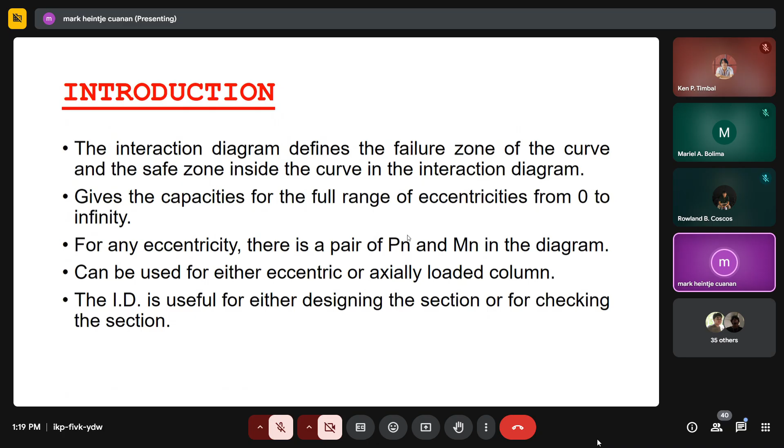So you may have a column subjected to a very small moment, but it carries a large amount of axial loading, wherein the intersection point goes beyond the boundary of our curve. Or it could be that the moment is very large while the compression load is small, but still, the same thing happens—it is beyond or outside our curve. So in that case, it is also an unsafe column.

So in the interaction diagram, we have actually 7 major points. Later on in our example, we are going to focus on these points, but actually in actual design you can iterate to make your curve smoother, since if you focus only on these major points, the tendency is that the curve will not be smooth, unlike the results from software and so on, wherein the curve produced is very smooth.

And so we have here 7 points, and our calculation later on will also be basing on these particular points.

So the first point is point 1, wherein we will have axial compression with zero moment. This is the point wherein the column is subjected to pure compression without any moment at all. In this case, the formula that governs is P sub O, whatever the value of our P sub O, which is dependent on the type of column. It could be a tied column, a spiral column, or a pre-stress column. That is how we determine P sub O, or point 1, wherein point 1 is purely axial compression with zero moment value.

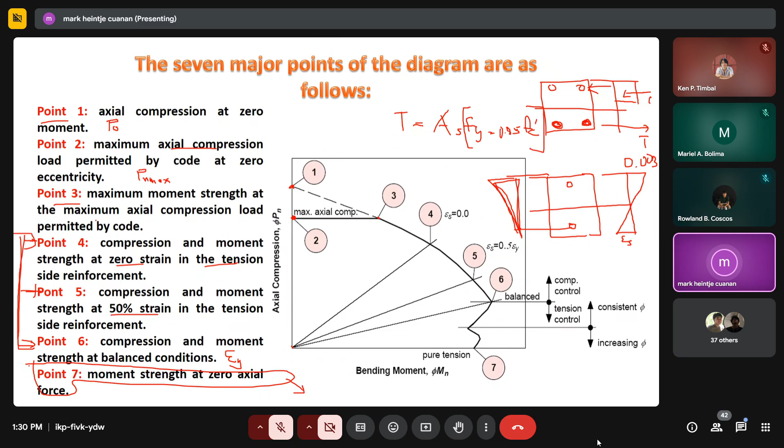So we are going to derive these points and create our own interaction diagram. But take note, this afternoon my focus is only on this simpler case, for simplicity, and so the calculation becomes easier, where reinforcement is only on two sides.

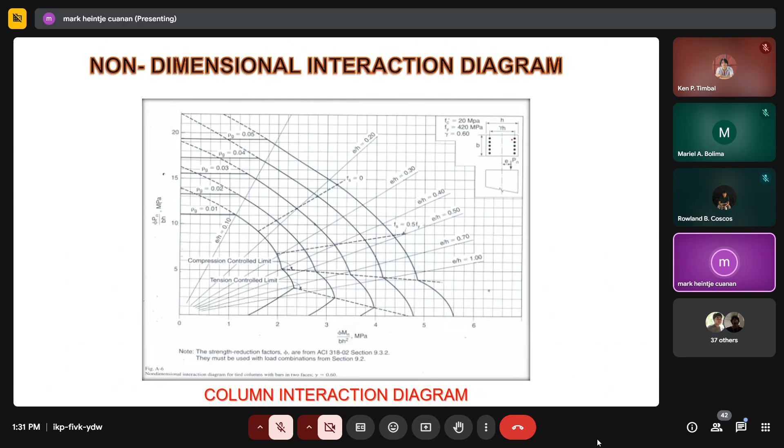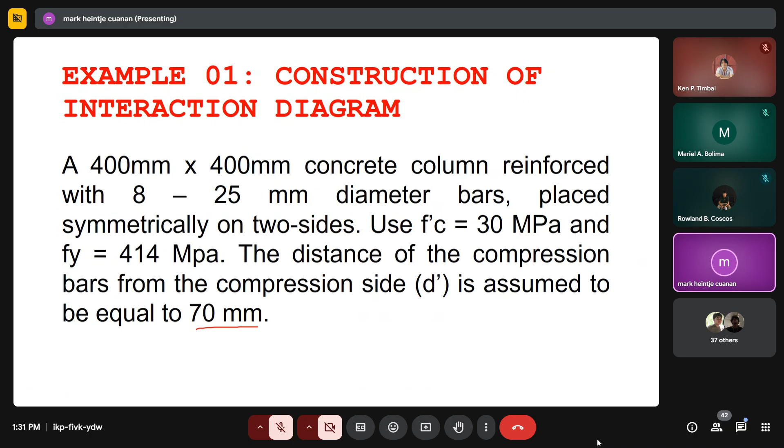Allow me to transfer this into my Excel file, which I have already provided to you for reference, because when you design your column, your plate, we are going to construct your own interaction diagram. So here I am going to write the different given basic parameters.

So here I write 400 mm for the side of our column. Take note, when the column is rectangular, you tend to create two interaction diagrams because it has different capacity on each side. Although in this particular column the sides are the same, it will still produce different capacity.

If we look at this, let me print screen. Okay, so if it's like this, when we design it like this, our consideration for the compressive force will use reinforcement on each side of our column. So this is the compression side, and this is the tension side.

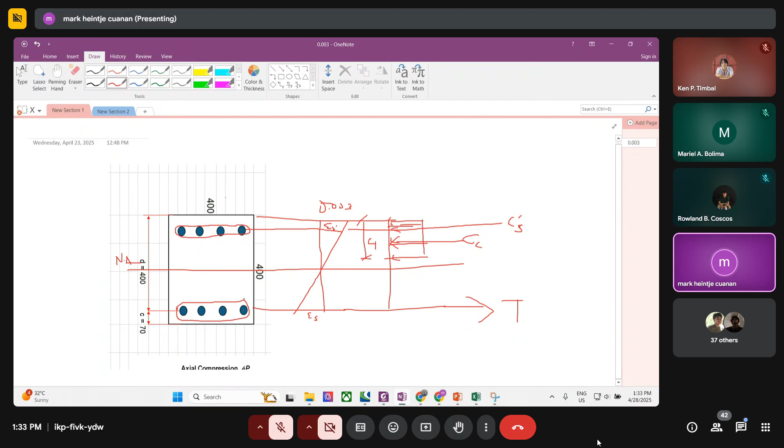But when we rotate it like this, you will have different values, meaning in terms of the compression side, you have compression reinforcement forces here coming from this reinforcement, and you have tension reinforcement, which is also two pieces, coming from this reinforcement.

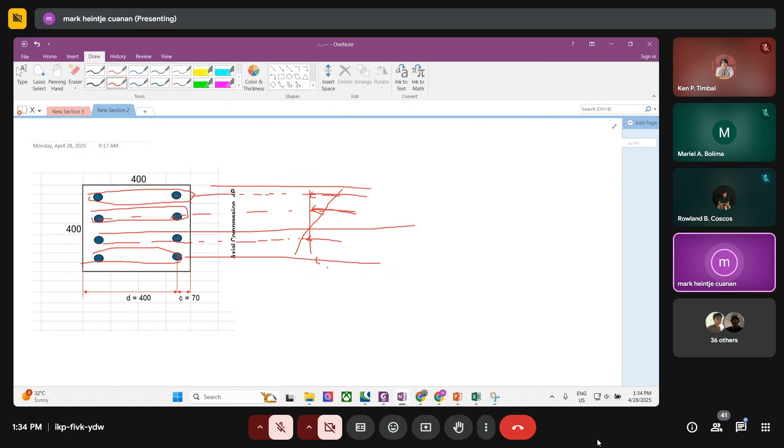But take note, the calculation method we are going to do later will be used in all types of columns or configurations. You just modify it based on the reinforcement configuration. Okay, so let's go back here.

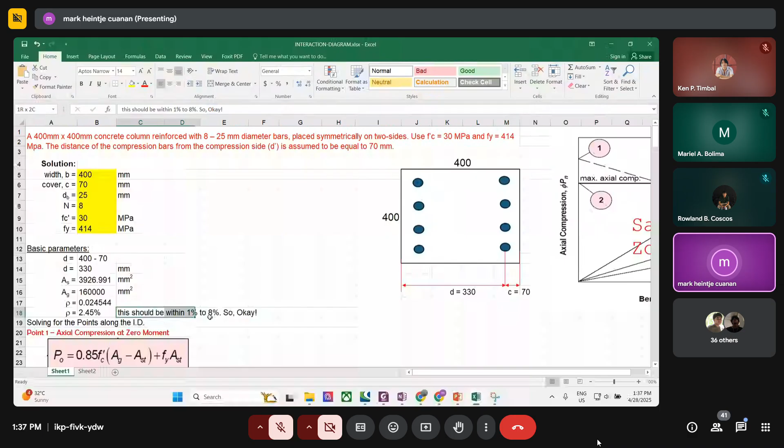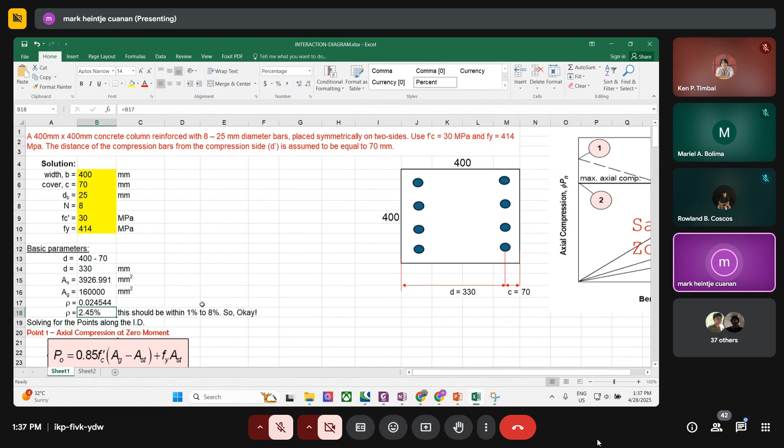So we got 2.45%, and that is within our limit of 1 to 8%.

Okay, so again, at point 1, this point 1 here, this is actually the P sub O, our axial compression at zero moment.

So that is why in this case the P sub O will be 0.85 of FC prime, the gross sectional area of our column minus the steel area, plus Fy times the steel area. So it will give us a value of

5,605.636. So this is the point 1 here. So its coordinate is 0 for our moment, with P sub n or nominal axial capacity equal to P sub O, that is

5,605.636. Then our point 2, this is the maximum permissible compression based from the code, at zero eccentricity. And according to the code, for a tied column, the Pn max is simply 0.8 of P sub O, so that means 0.8 of P sub O gives us

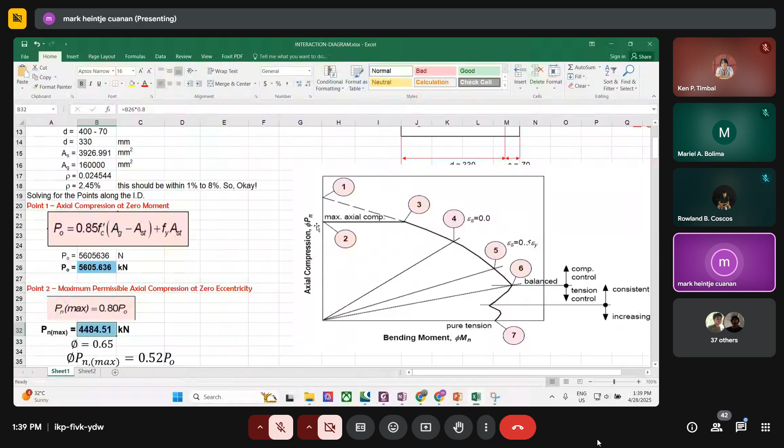4,484.51. So that's the coordinate for this point 2. So point 2 now becomes, its coordinate is 0 for our moment, with y coordinate of

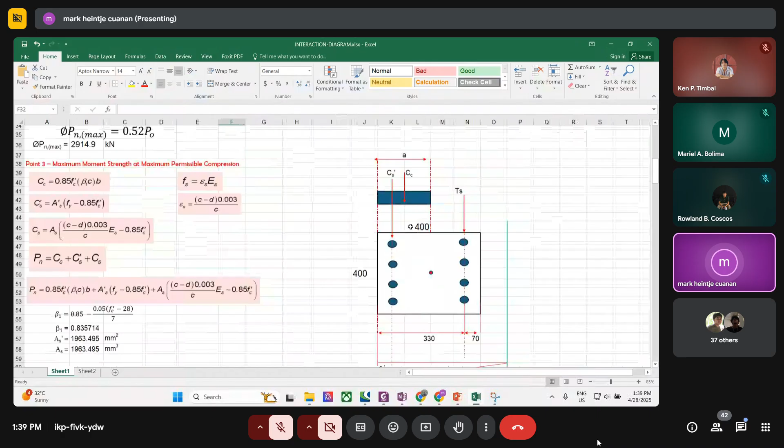That's the calculation. So if you notice here, at point 3, our depth of compression or our neutral axis goes beyond, it actually goes beyond the width of our column. So if you notice, our letter C, or our depth of neutral axis here, exceeds 400.

That is normal for point 3. So take note of that, at point 3 our neutral axis really exceeds, it will go beyond the width of our column.

And then from that alone, this is our C, meaning the area is beta 1 of C. And then from the compression side, this is C sub C, the compression which is produced by our concrete.

This is the compression produced by our concrete. And of course, our C sub S prime, which is the compression force produced by our steel reinforcement at the compression zone.

And this one, you can put it here as C sub S or T sub S for the tensile reinforcement. But in this case, it becomes C sub S. Allow me to change this one to C sub S, because it is within the compression zone. It's still compression, right?

Okay, diba ang atong tensile zone is where our neutral axis or our strain transmits from compression to tensile. But if you notice, the compression reinforcement, supposedly the tensile reinforcement, at the right side here is within the compression zone, so that means it is still a compression force. That is why instead of the arrow going up, opposite to our compression forces, its direction is the same with regards to our compression forces.

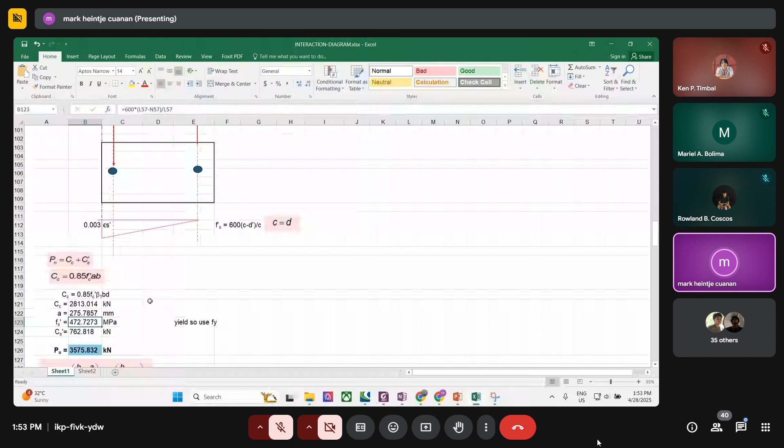Okay, so the resulting C sub C now is 2,813.014. Before we use our F sub S, we check if it yields or not. We solve for F sub S prime first. Going back to our beam, we use ratio and proportion to get the strain, and from that strain we multiply it with our E sub S to get our F sub S. In this case, the resulting value is 472, more than the 414 yield strength, so that means this yields. So instead of using F sub S, we are going to use Fy.

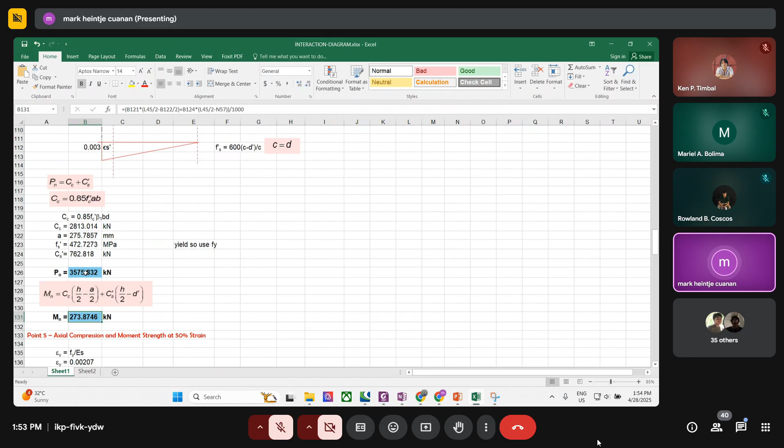So if Fy yields, this means C sub S prime is the same value. Fy applies here, so we just equate it. They are the same, meaning P sub N is simply the sum of C sub C and C sub S prime. And of course the moment from our tensile reinforcement is 0, so we only have C sub C with its moment arm and C sub S with its moment arm. So the coordinate now of P sub N and M sub N becomes the coordinate for point 4.

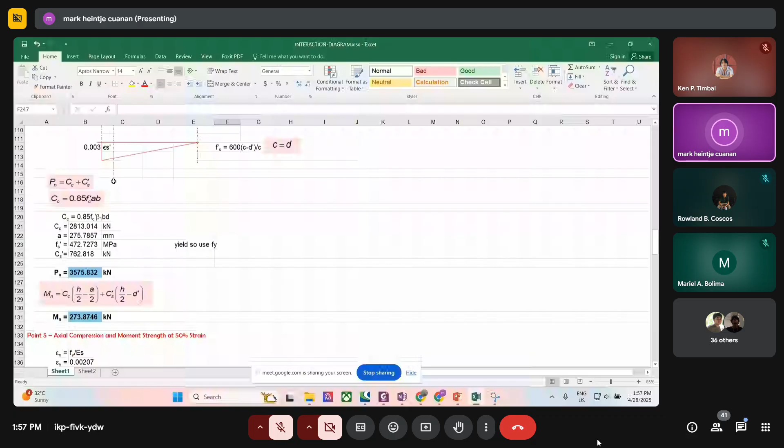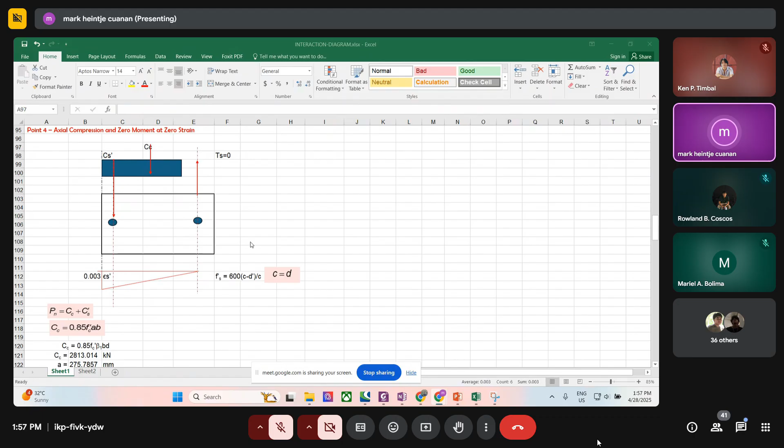We assume that the strain at the tensile reinforcement is equal to 0 for point 4. Now for point 5, the process is the same, but this time the strain at the tensile reinforcement is simply equal to 50% of our yield strain. So we get the yield strain, that is Fy over Es, take 50% of it, and that gives us the value of the strain here. That's the target strain. And then we use the same process just like what we did earlier.

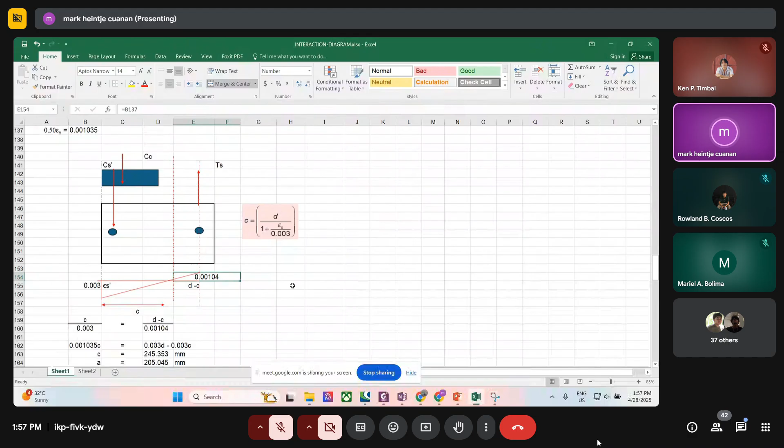So we solve first the value of C since these are already given, by ratio and proportion, and we already have the value of our D. So we get C equal to 245.353, and that also gives us a value of the depth of the compression block, 205.045. So from these values we get the value of our C sub C, and then we check the value of our Fs prime to see if it is yielding, to get the value of our C sub S prime.

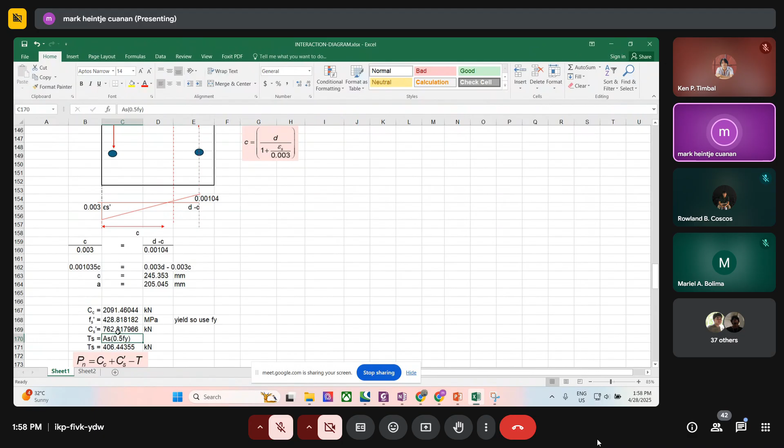If you notice, this is also yielding, so that means the C sub S prime we use is the same, since the steel still yields, so the resulting force is also the same. For our T sub S, the tensile force, you will notice we only use 0.5 of Fy, since our assumption here is that only half of the strain is being utilized, so our tensile force is also half of our yield strength. Then we get the moment, the capacity moment.

But if you notice here, in the nominal moment, all the moments produce positive values, because the directions are opposite. When we take moment at the center, this is counterclockwise, and this other one is also counterclockwise, so that's why they are all positive there. It will give a value of 355.874, that would be the nominal moment capacity.

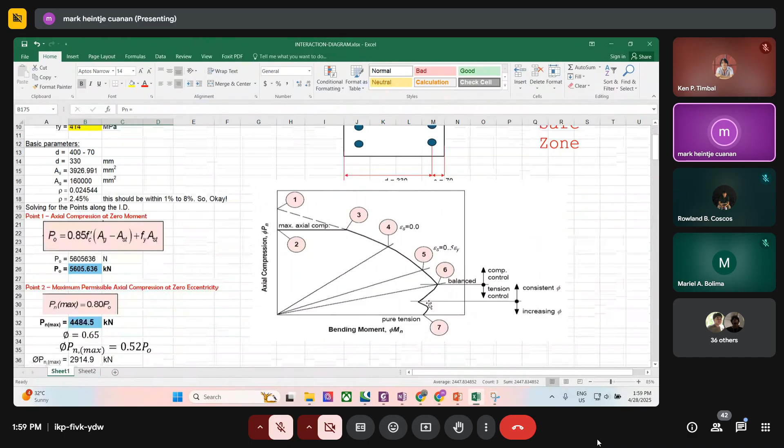Considering 0.5 of the strain, so these coordinates now, take note, this is the coordinate at point 5 on our diagram. And then point 6, that is the balance condition.

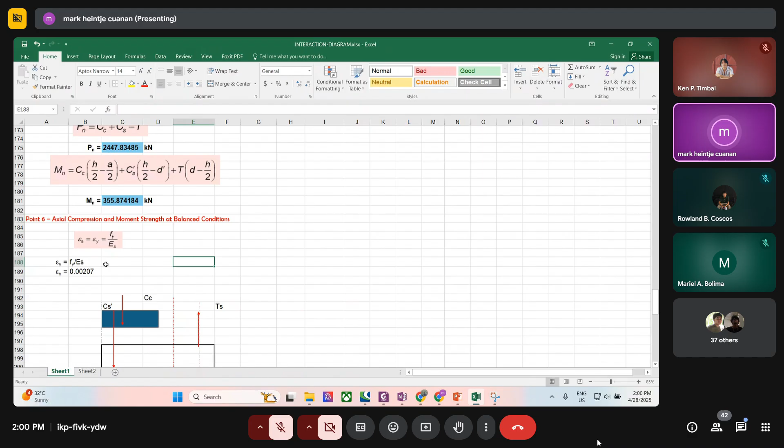So in the balance condition, we just assume that the strain at our tensile reinforcement is yielding, so that means E sub S is simply equal to E sub Y. In this case, the yield strength at our tensile reinforcement is also yielding, so that means it is equal to F sub Y. Okay, so we use ratio and proportion again.

But in this case, we don't actually know if our compression reinforcement yields or not, so that is why later on we will check if our compression reinforcement yields or not. So if you still remember this formula for balance condition, our depth of neutral axis is 600D over the quantity Fy plus 600. So we get C sub B equal to 195.266.

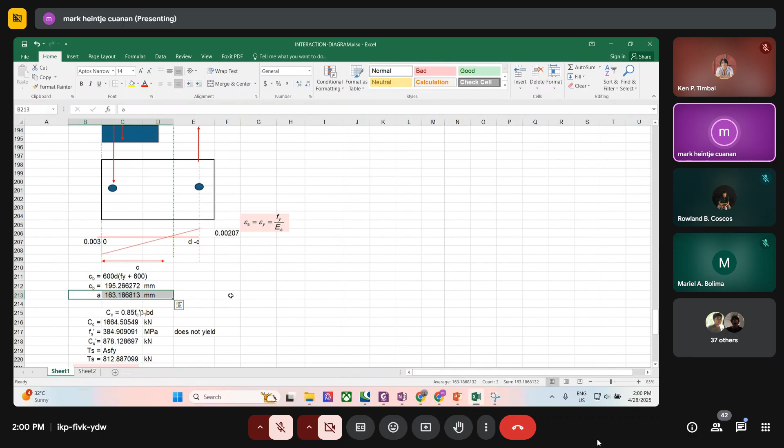A is 163.1868, wherein we can use that for our formula here - this one doesn't apply actually. So we get C sub C, that is 0.85 Fc prime times A times B, so we get 1,664.505. When we check the Fs prime here, same thing, we use ratio and proportion again.

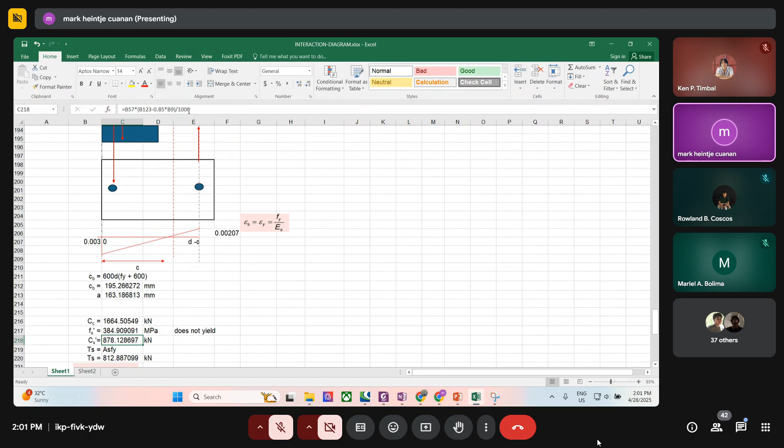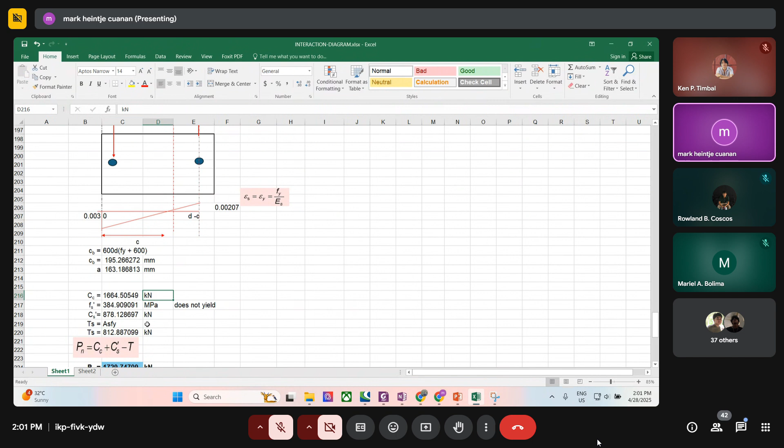So it is less than our 414 yield strength, so wala siya nag-yield. So unang nag-solve kag bag-o, kumbaga, nga compression force based on our compression reinforcement. Si T sub S, ato lang i-multiply, no? Ang ato ang AS, i-multiply lang na to actually. ASFY lang siya largo, ASFY.

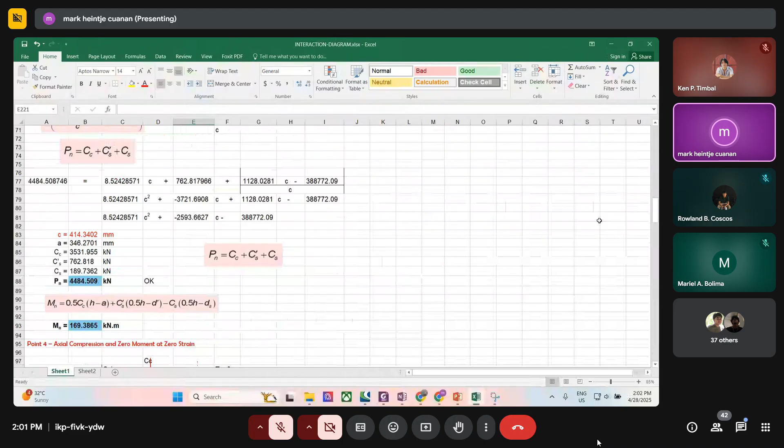So ano yung atong P sub N? I-add lang nato ang duha ka compression minus the tension, and then you get the moment capacity. So ganina, same ra nag-process kung ganyan siya ito nato pagbuhat ganina. Same ra itong process nga gamiton nato to get this particular value. So same pa rin, you extract the values of your nominal axial compression and nominal moment capacity, because this will give us the coordinate of our point 6, itong point na to.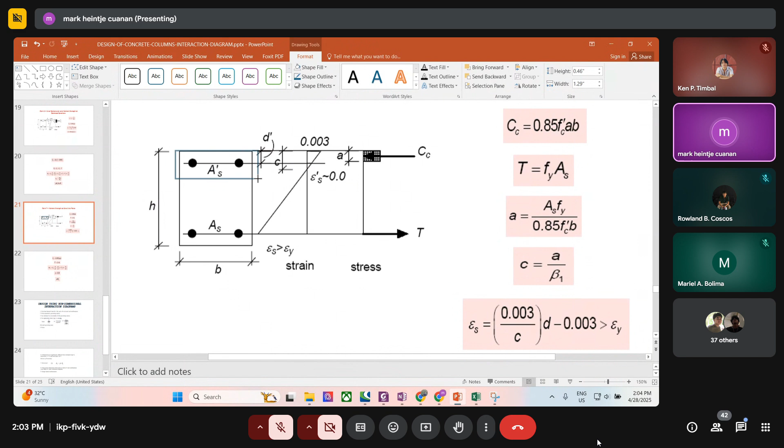So wag kay mabuhat ana, i-appeal gyud nimo ang compression reinforcement. So for example, A nimo nga ko is ingon ani, so i-appeal gyud nimo ni, kay ano man siya, included man siya sa compression force. But in this case, since almost 70 man siya, wala siya appeal, so please allow me to disregard the effect of my compression reinforcement.

So naa tay moment value nga 235.861. So kana dayon nga mga moment and actual capacities from point 1 to point 7, ato din ang i-tabulate. Mao ni siya. This is the first, or these are the values coming from the calculation ganina.

Pero dapat kani wala pa ni siya'y reduction factor. Okay, wala na siya reduction factor. Right? So and then i-plot dayon nato na, mo ni nga plot. Now this is now your interaction diagram, wherein kung given ang ato ang mga forces sa ato ang column, for example, ang

Actual compression nga gi-carry is 3.5, so na diri, yan, nag-carry dayon siya og moment nga 170, di ba? For example lang 170 ang iyang moment nga gi-carry, so naa siya diya. So that means below siya sa tuang curve. In terms of nominal capacity, safe siya, kay within man siya sa safe zone. Pero kung ang intersection ganit niya mula pas palong didto ana lugar, unsafe na din siya.

But take note, dili kani ang atong gamiton to investigate the column, kay dapat ang atong gamiton is katumang na anay reduction factor. So mao din ang reduction factor na to kung pag compression control ang akong gibuhat, lang ani gi-multiply lang nako kanitanan nga value dire, gi-multiply lang nako by 0.65. Mao ni sila, kay compression control man. So 0.65 akong gi-multiply mo ni ang value, then ako dayon siyang gi-plot.

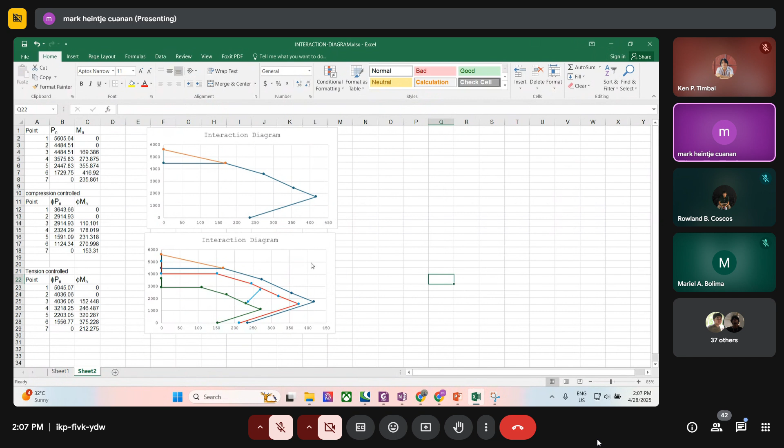This particular Excel file I uploaded to your GC. This is what you'll use so it's easier for you to design your concrete column. But just modify it if you want, if you want the reinforcement equally distributed, just modify it because of the calculation.

Wherein, in this case, if you consider center reinforcement there, for example, the tendency is to add force corresponding to this number of reinforcement and another strain here. Okay, so that's it. And then you follow what we did in the calculations presented in this particular Excel file. Alright?

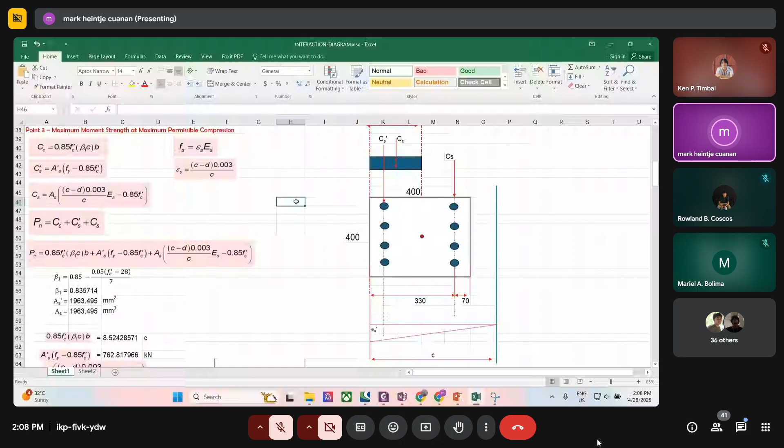Do you have clarifications? Questions?

By the way, we don't have a quiz with regards to this topic.

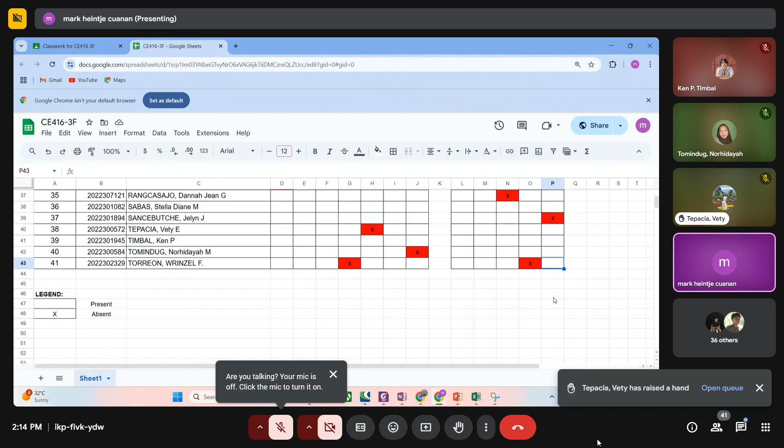So let us now proceed to the shear capacity or design for shear of our column. The design for shear in columns has a short discussion because the design of shear in columns is the same as in beams.

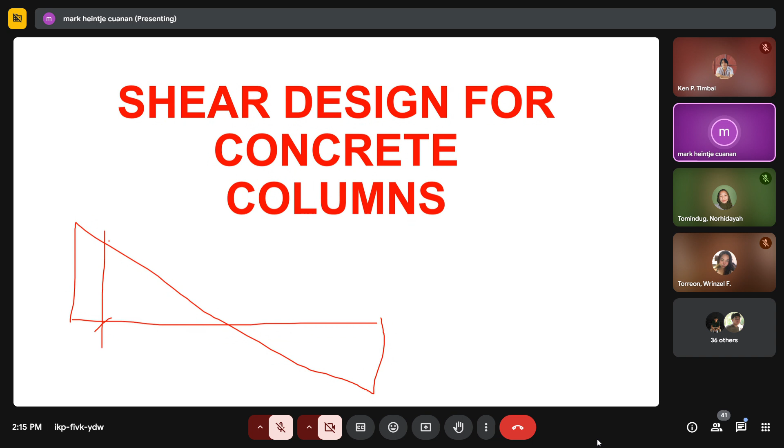The only difference is that you don't need to solve for your Vu at d distance. Remember, when analyzing a beam, you solve for the shear measured from the d distance from the support, using the shear diagram at that distance for your shear design.

In columns, it's not like that. Whatever shear the column carries, that is what you use for the design of shear. So actually it's easier. The formula remains the same: Vu equals the reduction factor times the shear provided by concrete plus the shear provided by our lateral reinforcement.

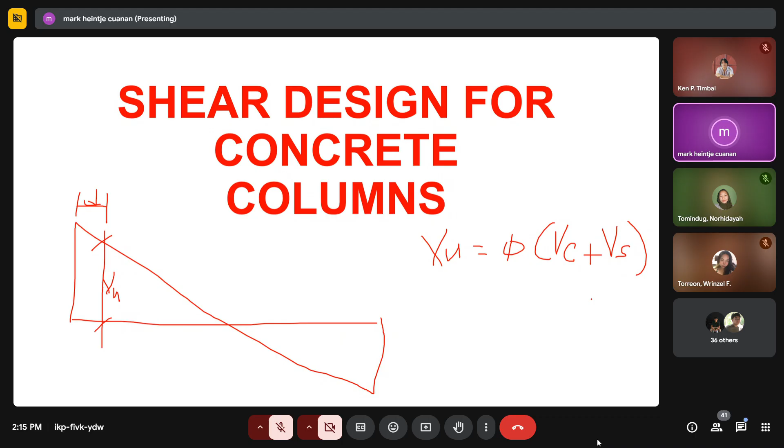So here I am going to discuss a sample problem. This is actually a sample problem from the November 2023 board exam, part of the structural problem. A 600 by 800 column is reinforced with 16 25mm diameter bars.

The 16 bars are equally distributed, with 5 reinforcements in each corner of the column - 5 along this direction, 5 along that direction. Notice that the lateral ties in the X direction have 4 legs, 1, 2, 3, and 4, while in the Y direction there are only 3 legs.

Lateral ties are 10mm, main bar strength is 415, lateral ties 275, f'c is 28 megapascal, concrete cover is 40mm, and spacing of the ties is 150. So, what is the nominal shear strength in kilonewtons of the column for shear parallel to the y-axis, what is the nominal shear strength parallel to the x-axis, and what would be the nominal compressive load of the column considering zero eccentricity.

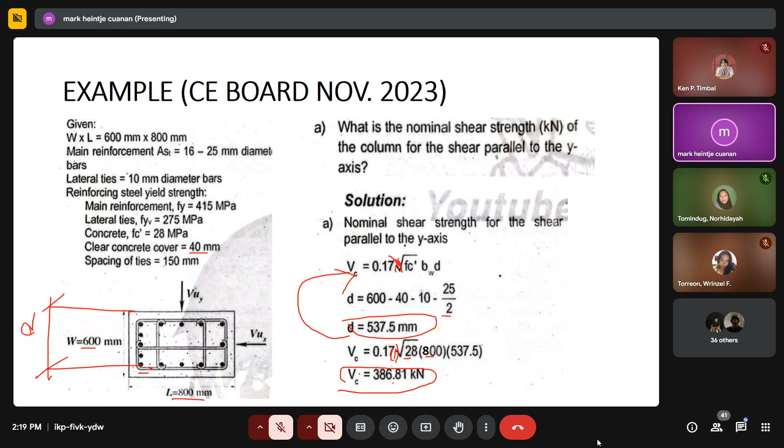To solve for Vs, we use the formula: Av fyt D over S, with spacing of 150.

In this case there are 4 legs since we're getting the capacity for the y-axis, so the legs resisting this shear are 4. So pi over 4 times 10 squared times 4, which equals 314.16. We substitute this back into the formula: Av fy, D effective depth, and spacing of 150.

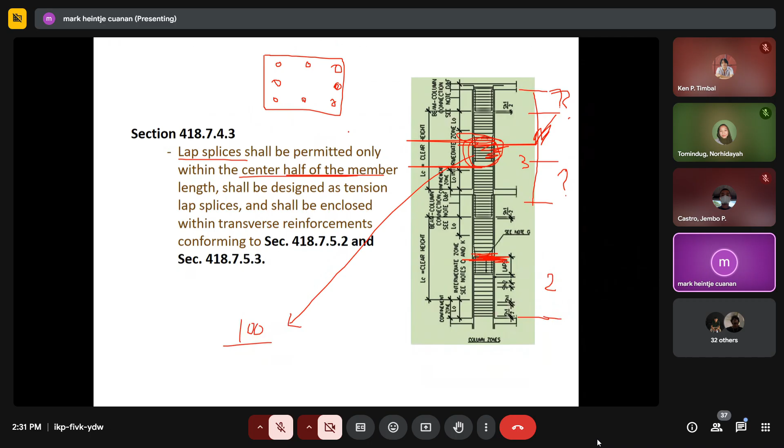With regards to our lateral ties, the stirrups in our column, we need to provide hoops, wherein the length of the hoop should be marked as L sub O. For example, in our beam and column, we need to provide a hoop - this hoop is the stirrups where we congest the reinforcement.

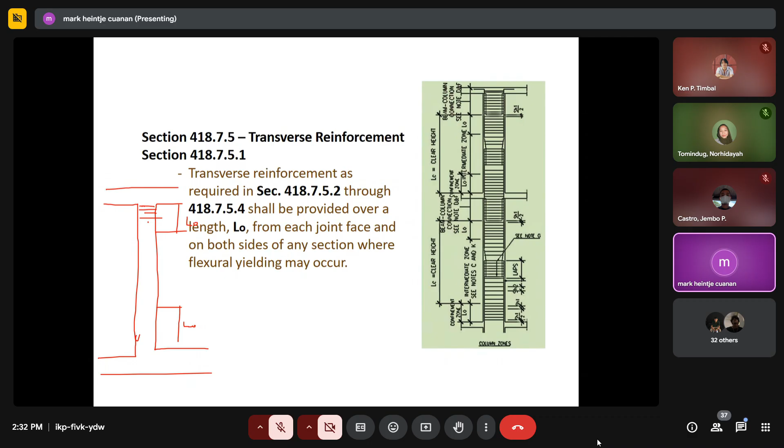Within a length of L sub O, both ends of your column - that's where our hoop, our congested lateral ties, is part of. So what is the length of our L sub O?

It would be the largest among the following. Number 1, the longest dimension of your column, or H - the longest dimension of your column.

So if you have a 400 by 500 column, the governing dimension is the 500 or 0.5, or clear distance over 6.

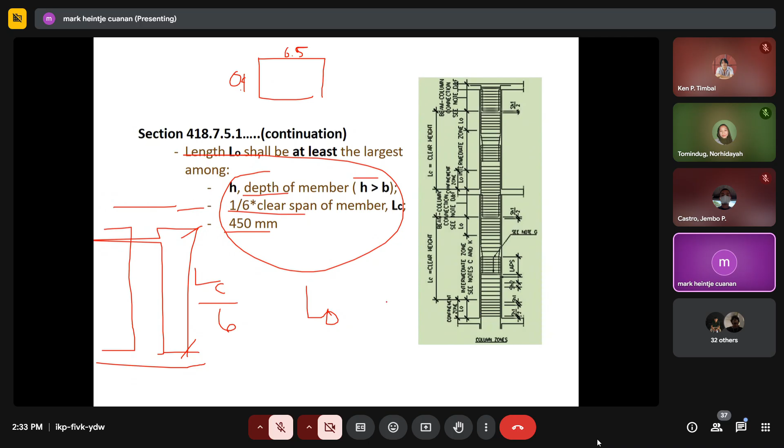For example, in the column joint, the clear distance measured from end to end of our beam - this is the L sub C. Divide that by 6, and that governs, or 450, whichever is larger - that becomes the length of our L sub O, or our hoop.

Then the spacing of our transverse reinforcement within the hoop should be the smallest of the following: 1/4 of the minimum column dimension - for example, if you have 400 by 500, minimum column dimension is 400 divided by 4, that's 100. Or 6 times the smallest longitudinal bar.

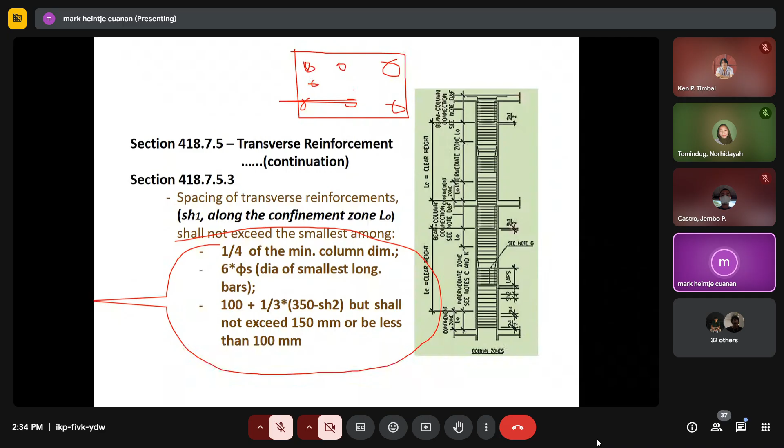Or 100 plus 1/3 times 350 of the longest dimension, but shall not exceed 150 or less than 100. So whichever is smaller, that governs the spacing of our hoop.

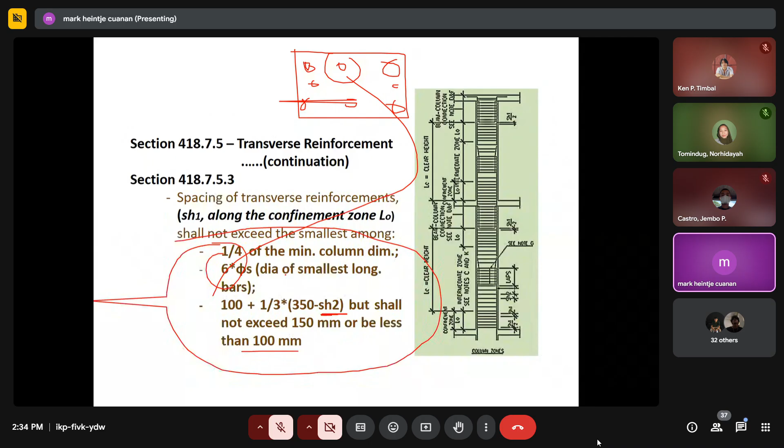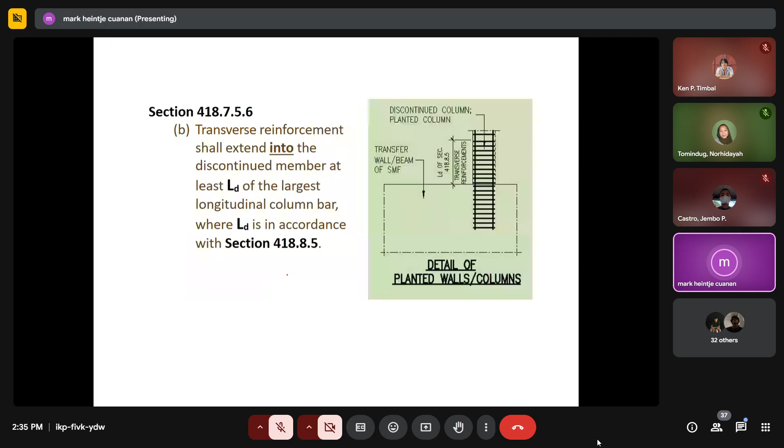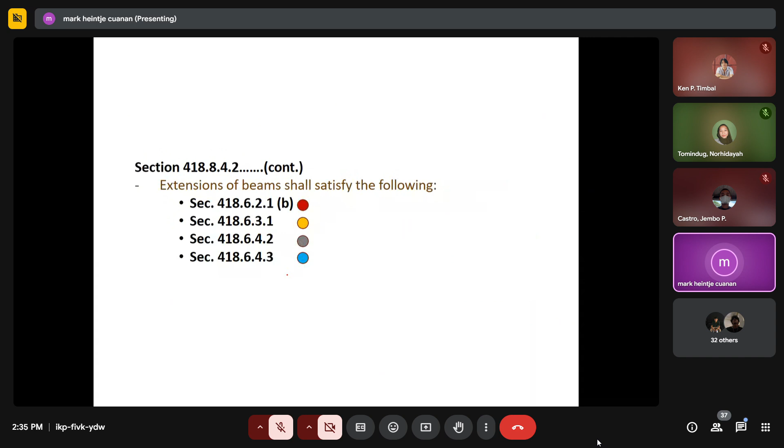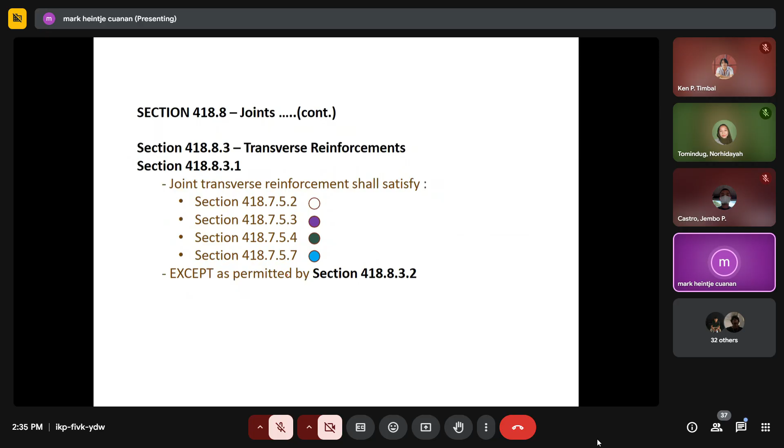Beyond the hoop, or beyond the L sub O - what's the spacing there? Beyond the length of L sub O or beyond the hoop, the spacing shall not exceed the smaller of 6 times the smallest longitudinal bar or 150.

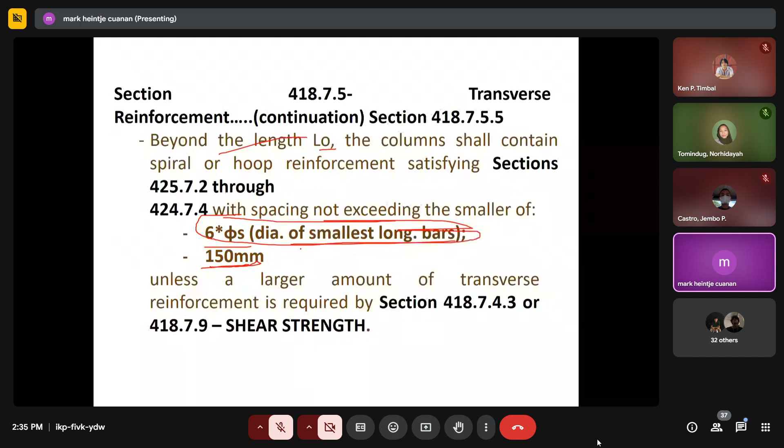Alright, so any question, clarification so far? So let's focus here - main seismic detailing, main reinforcement and seismic detailing of our lateral ties.

Do you have any question? Hello, are you still there? Sir.